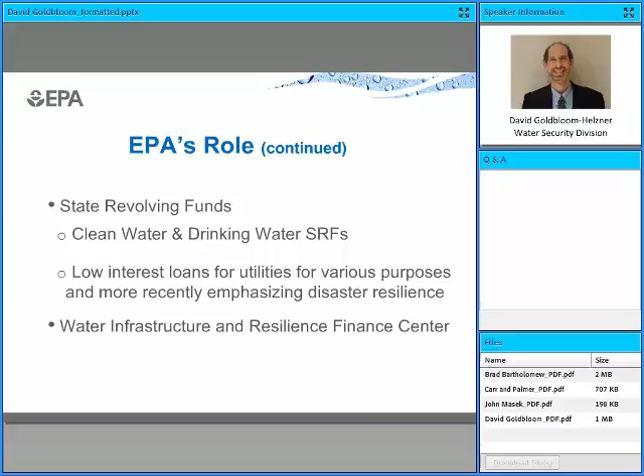I'm pleased that Jim Gebhardt, Director of the Water Finance Center, is here to give an overview of the center. Jim?

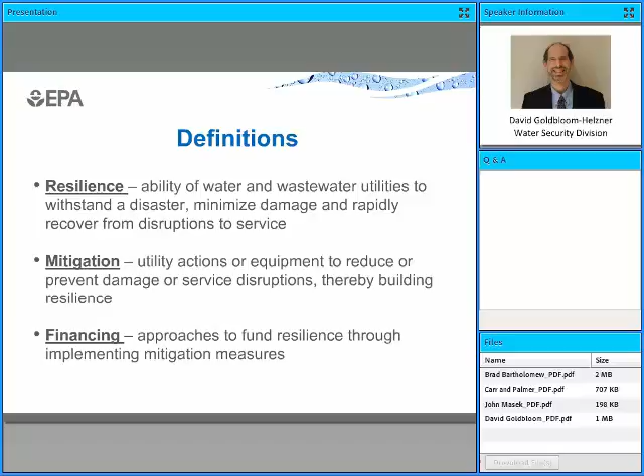I want to define some terms so everyone on this webinar can be on the same page. There are many definitions of resilience. We'll use this one: resilience is the ability of water and wastewater utilities to withstand a disaster, minimize damage, and rapidly recover from disruptions to service. Mitigation are those utility actions or equipment to reduce or prevent damage or service disruptions, thereby building resilience. In the next slide or two, I'll show you examples of mitigation actions or measures. Financing are the approaches to fund resilience through implementing mitigation measures.

Also, with mitigation, you'll be better able to withstand and recover more quickly from a disaster. And finally, with mitigation, you can assure your customers that water and wastewater services are reliable even in a disaster.

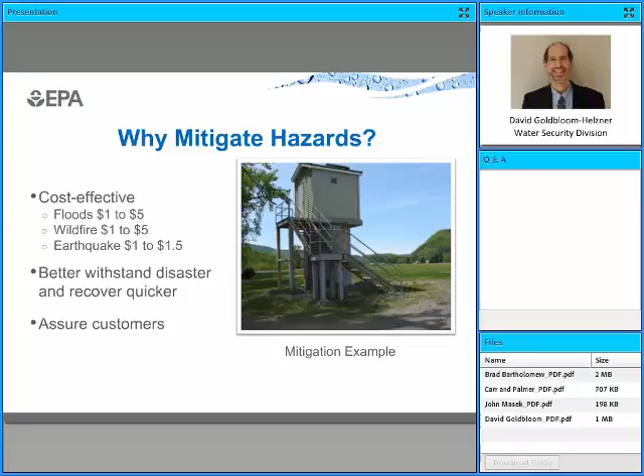For example, in upstate New York, one town decided to mitigate the threat of flooding they had from heavy rains. They invested in elevating their wellhead and their electrical panels, as you can see. During one recent flooding event, they were the only town in the area to continue to operate their drinking water well. This is really a mitigation success story.

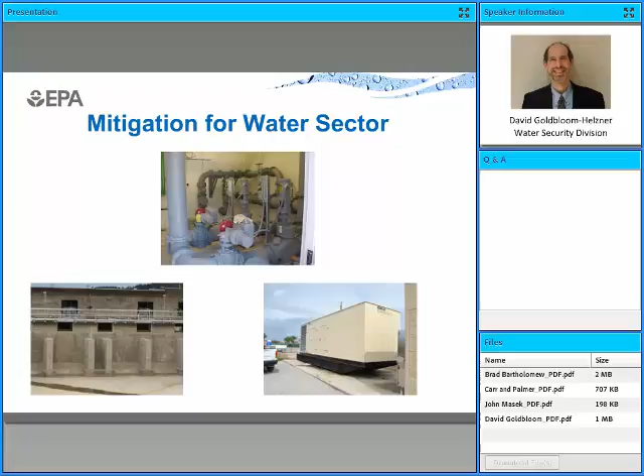Fortunately, water and wastewater utilities can connect into a national program for hazard mitigation and be eligible for federal funding.

So how to connect? To help you get mitigation funding, start by plugging into the existing partnership between the water sector and hazard mitigation agencies. If you are a water or wastewater utility, your counterpart is the hazard mitigation planner.

They are usually located in the local emergency management division or planning agency. Your local mitigation planner looks at all the natural disasters in your county or parish and writes a plan to mitigate the impacts. If you have an idea for a mitigation project at your utility, get it listed in the local mitigation plan so that it's eligible for getting FEMA or state funding. So it's a good idea to reach out to your local mitigation planner.

On the state side, oversight of your utility is at the State Primacy Agency or the State Environmental Agency. Their counterparts are the State Hazard Mitigation Officers, or SHMOs. Yes, they actually wear the title of SHMOs proudly. The SHMOs assist locals to identify cost-effective options and then rank the projects for funding. You'll want your project to be close to the top. Some of the mitigation projects you saw in my earlier photos were funded by FEMA mitigation funds.

And briefly, at the federal level, we at EPA coordinate with FEMA to encourage mitigation policies and funding that benefit the water sector. So let's look at how EPA's new tool, the Hazard Mitigation Guide, can help you reduce the impacts from natural disasters.

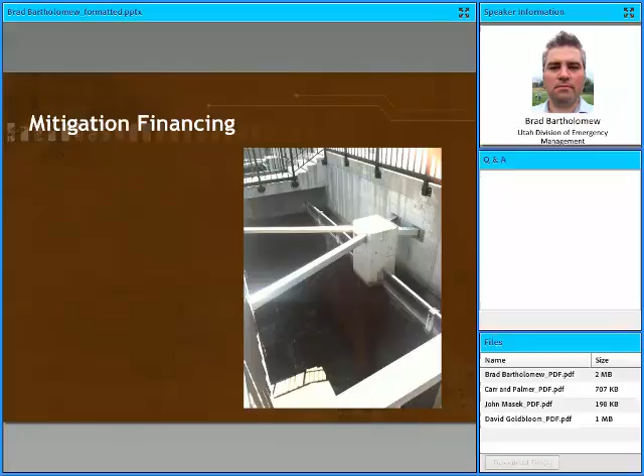And yes, we proudly wear the SHMO hat. There's a SHMO in every state. So again, my name is Brad Bartholomew. I'm the Mitigation Recovery Manager for the State of Utah Division of Emergency Management. And I'll be talking today about mitigation financing and how hopefully you can identify your projects and identify funding to complete those projects. So as I said, every state has a state hazard mitigation officer, and what we do is we assess hazards and identify mitigation measures to reduce risks.

We do that through developing hazard mitigation plans. Each state has a state hazard mitigation plan. The states are required by FEMA to receive not only mitigation funding but also recovery funding to have a mitigation plan. Those plans are updated every 5 years. Utah is currently, we just received funding from FEMA to start our 2019 update.

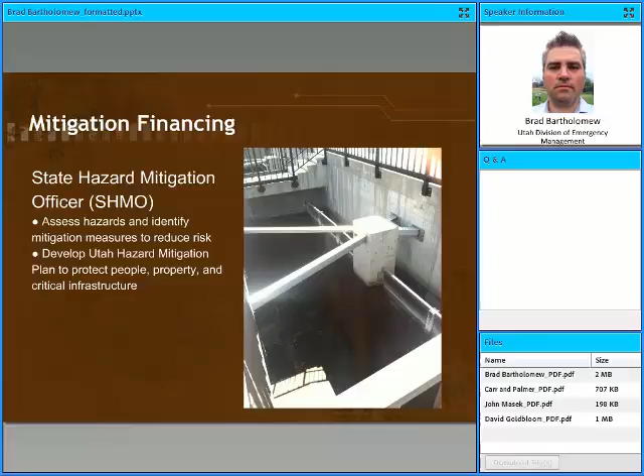Along with the state hazard mitigation plans, every local jurisdiction is required to have a mitigation plan as well if they want to receive any FEMA mitigation funding. The SHMOs assist all the locals, whether it be by city, county, or special districts. We have a variety of all those in Utah. We have several just county plans. Mostly we have what we call Association of Government plans, which is multiple counties get together since most of our state is rather rural. It's easier that way for them. And we also have a number of special district mitigation plans, and I'll talk a little bit more on why we've looked into and gotten into that.

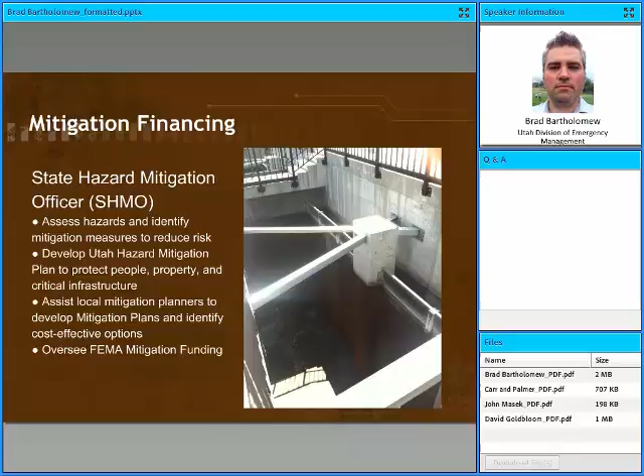And our main job, as well as mitigation planning, is overseeing the FEMA mitigation funding and then working with locals and people such as all of you on the line on receiving that funding, helping you identify projects, and walking you through the process of applying for and hopefully receiving the funding and then the management of the grants.

So David went over these grants. I'm going to talk a little bit more about them. So they're the Hazard Mitigation Assistance Program. And of course, working for the federal government, you have to have an acronym for everything. So we call this the HMA grant program. And under there, we have the Pre-Disaster Mitigation Competitive Grant, the Hazard Mitigation Grant Program, and the Flood Mitigation Assistance Grant.

So the PDM grant is the one we're going to be talking about mostly. Even though the PDM and HMGP are a lot alike, there are several differences. The most is HMGP is only available after you've received a federally declared disaster, and the amount of the funding that is given to the state is based on the total cost of the disaster that FEMA comes in and helps with.

And each state is allowed to decide on how they run that program and how they prioritize funding. I know some states, they use the HMGP funding for only those counties that were impacted by the hazard that was declared, disaster that was declared. Other states, such as Utah, we open that up to the whole state, so anybody in the state can apply for HMGP grants. And then we have FMA grants, the Flood Mitigation Assistance, and those are very flood specific.

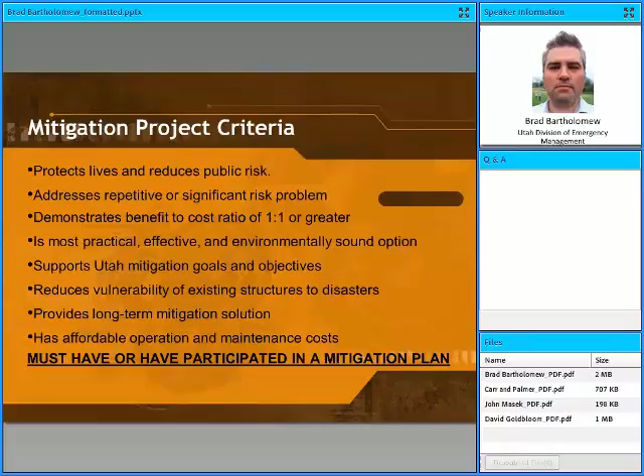So mitigation plans are where you identify your hazards, your risks and your vulnerabilities, and then you lay out how you're going to mitigate those. And during that process is when you prioritize your projects.

For example, Jordan Valley Water Conservancy District was the first special district in Utah to create their own plan. They created it with their own funding - I'm not sure how much they paid for it, maybe John after me can talk about that. We just annexed it to the state mitigation plan.

They participated within our state plan, and they were able to take that funding, or take their mitigation plan, and just start funding the projects they prioritized and found in their mitigation plan to be where they would save the most after an event.

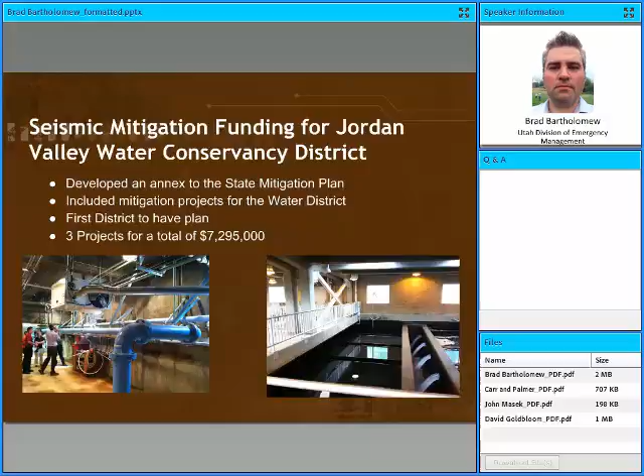Since Jordan Valley Water Conservancy District developed the plan, we've had several other special districts develop plans as well, and they've been very successful at developing their own plans and using that to obtain mitigation funding. The dollar figures you see are the federal funding - not the funding the special districts put in themselves, but just the federal funding they received because they developed their own mitigation planning efforts.

We've seen a large success in special districts developing their own mitigation plan and receiving funding.

Here are some examples - the Jordan Valley Water Conservancy District, as well as the Weber Basin Water Conservancy District. All of their local share, they came up with that themselves, just in-house funding. Once they developed the mitigation plan and had their priorities listed for their projects, they were just able to put that into their capital funds improvement plan, and so they funded for that.

They knew that these are the buildings that we're going to have to retrofit. Let's just start putting funding aside for those - and then they were able to use that funding to get federal funding and help offset the costs.

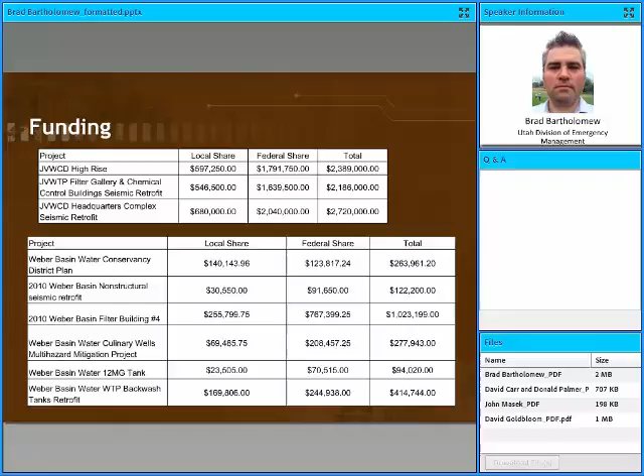And just to close up here, some tips for financing resilience mitigation. The number one tip is to write your own mitigation plan. You might receive some pushback from your SHMOs, and you also might receive some pushback from FEMA. We had to talk FEMA into allowing us to write these local district plans, but the success we're seeing shows that these smaller localized plans really get special districts in focus on what they need to do, and they're able to apply for solid grants. During the planning process and identifying projects, you do a lot of work identifying the projects that need to be done and how you need to do them. And so when you write the mitigation grant itself, you have solid grants that move forward and get funded.

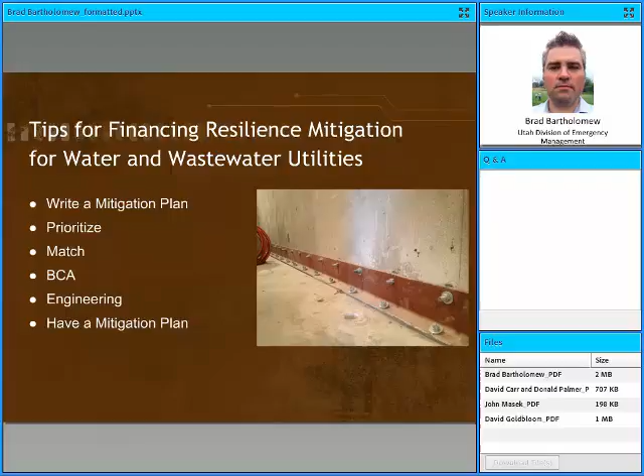Okay, thanks Brad. And just to add to that, I'm actually working with a community in Iowa now that deals with flooding, and the State Hazard Mitigation Officer staff is helping to collect the data and will assist the utilities to do the cost-benefit analysis. So in some cases, they may not really need a consultant to help with that.

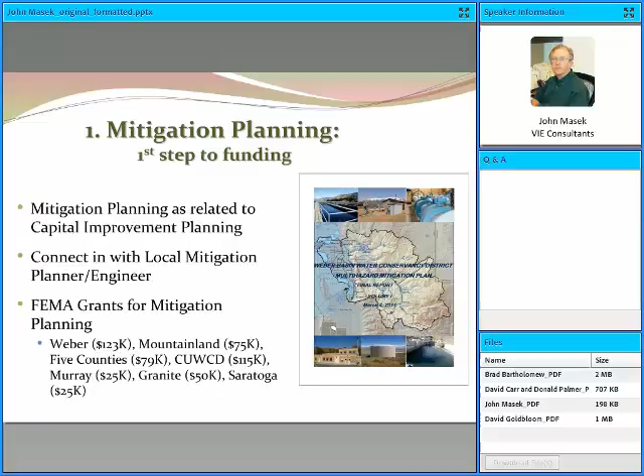The list here shows other hazard mitigation plans that have been approved by FEMA and funded in part by FEMA. So you see, you don't really have to just fund the plans yourself. You can develop a grant to ask that the funds be partially paid for.

This particular project was funded by more than one federal agency. FEMA, through the state, funded the hazard mitigation plan to identify the project in the first place. FEMA funded a portion of the project related to retrofitting critical equipment at the pump station to make sure it was properly anchored, that the pump station itself was sound.

A separate grant was submitted to the Bureau of Reclamation. A grant period is open right now called the WaterSMART program through Reclamation, and Reclamation actually funded the expensive part of the grant to line the canal.

I say that because a lot of the participants in this call were interested in flood and hazard mitigation. The lining of the canal mitigated both flooding so that the canal wouldn't fail, and secondly, was very effective in mitigating a drought. Precious resources from water, instead of just flowing into the ground, were saved there and continued on to be useful. So that was an example of coordinating with more than one federal agency to fund one project.

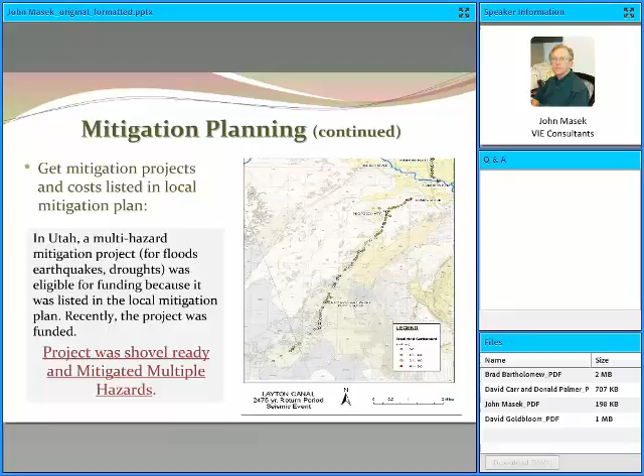So the BCA analysis is a mathematical analysis. It looks at the cost of a project, which needs to be well documented. What FEMA likes to see on their BCA analyses, and for that matter Reclamation and others as well, is sufficient backup to show that the costs really are what you say they are.

There needs to be some level of preliminary engineering and analysis to determine what the cost would be, what the maintenance cost would be. It's not something you can just say that we think this is what the cost is. You have to be able to document it thoroughly.

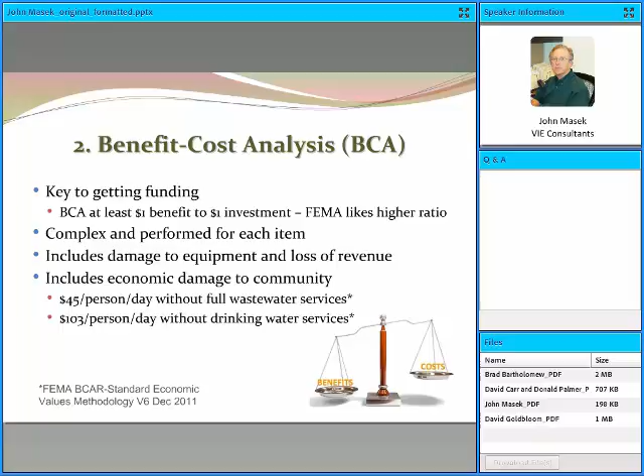One thing about water and wastewater districts is usually they can have a rather high BCA compared to some of the numbers you saw there for earthquake. In the case of earthquake or flood or drought or any of those things we were just talking about, the benefit can be quite high because many people are affected by one mitigation project.

This is an example here. As I mentioned, Weber Basin Water looked at all its facilities, 4 water treatment plants, dozens of wells, hundreds of miles of pipelines, and so on, and identified 17 projects out of all of that that really would have the best effect on mitigating hazards for them.

This is a backwash tank. Those of you in the water, wastewater industry will know what that is. It has to function, otherwise the water treatment plant itself goes down. So in this particular case, if the backwash tank were retrofitted, its reliability following an earthquake was greatly increased. There are a large number of customers affected by this.

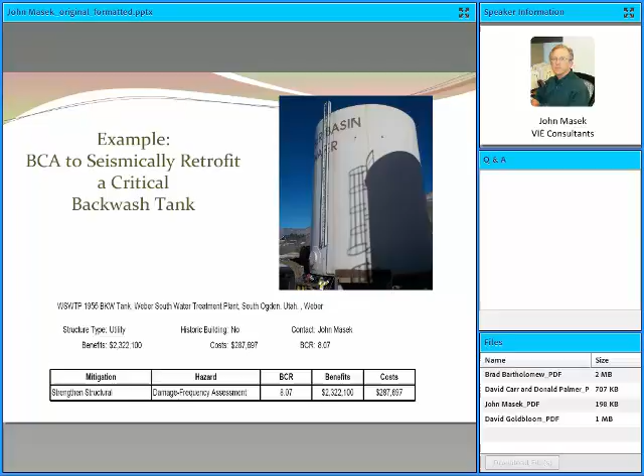Using FEMA, there are different modules that FEMA has in their hazard mitigation software. One of them is called a damage frequency assessment module, and you can see the benefit cost there, BCR is 8. That's a very high benefit for the cost. You can find it by carefully selecting the components, your facilities that are the highest risk and that have the highest benefit, your chance of getting funding is drastically improved.

So with regard to prioritizing the projects, sometimes you'll find projects like I just showed you that have a relatively modest cost and have an enormous impact on your facility. Sometimes the cost can be higher. We looked at some of those larger projects that were funded, but the BCR can still be very high and useful in terms of mitigating the overall system risk.

In the case of water and wastewater utilities, there's an urgency in recovery, and therefore mitigation before a disaster is really something that should be strived for because, for example, in the canal I showed, having that canal fail or the pump station fail and then trying to recover from 3 hazards, drought, earthquake, and flood, would not be a good approach. So pre-disaster mitigation was the program that was used there, partly by FEMA and partly by Reclamation.

Another type of project I want to show correlates back to the hazard mitigation plan. This is again Weber Basin Water, one of their water treatment plants. Usually on water treatment plants, building an entirely new plant isn't what happens. More often, existing water treatment plants are modernized. The left half of that slide is all new filtration buildings and chemical process buildings, and the right hand is mostly existing basins that were retrofitted with some new basins.

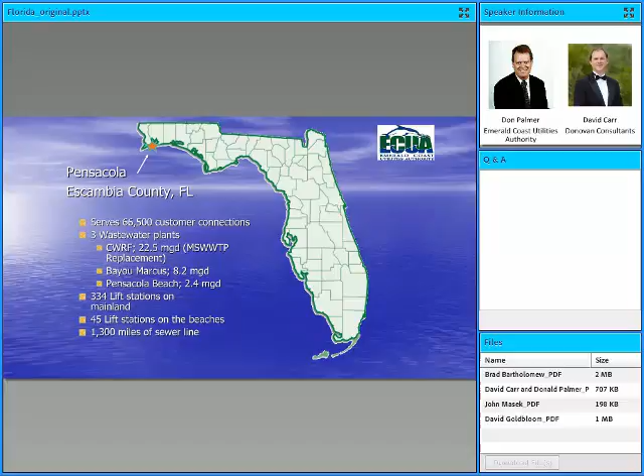Back in early 2000, ECUA formed a committee due to public input to study whether to upgrade in place or replace the Main Street wastewater treatment plant with a new facility. It was the Strategic Main Street Replacement Team. They called themselves the SMART Committee, and they funded a study.

The county got involved. We are a special authority, set up by the state legislature. We took over the infrastructure of the city and the county. The idea was to implement cost savings due to one entity operating them both, and to close down a bunch of facilities, and we did that. But we are a separate authority, though the county was involved, with joint kind of support from the county.

There were a lot of people wanting to move the plant, and the study came forward and said we really want to move the plant, not upgrade it where it was. There are some reasons for that, but out of the study, the problem was, like most governmental studies, we didn't have any funding. The board was not willing to increase rates enough to move a wastewater treatment plant. So they set forth a funding plan: we're going to come up with three sources of funding, trying to get a third of it federal, a third state, and a third local. That's kind of where we started off on this project.

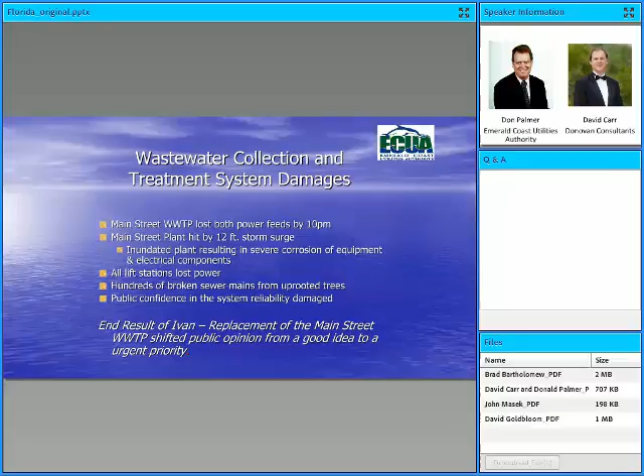And that helped us work with our SHMO. Miles Anderson was instrumental in making this happen. And so that was the main thing that happened with Hurricane Ivan. So with that, I'm going to turn it over to David Carr.

Good afternoon. As Don mentioned, prior to Hurricane Ivan, we had a feasibility study that basically indicated we need to get the plant out of downtown Pensacola and away from the danger of the hurricane surges and high winds. This is the plan that resulted from that feasibility study, and like Don said, it was completed in about late 2002.

From 2002 through Hurricane Ivan, we were pursuing funding. With Hurricane Ivan, that funding became much more possible. So through the feasibility study, we developed this rough plan. While we were pursuing funding, we also started on a facilities plan, and that facilities plan resulted in the details of this.

In the lower corner of the map, you can see where the existing treatment plant is. At the very top end of the map, you can see where our new wastewater treatment plant is, the Central Water Reclamation Facility, approximately 18 miles inland. Some major features of this system include 3 regional pumping stations and force mains ranging from 18-inch up to 54-inch.

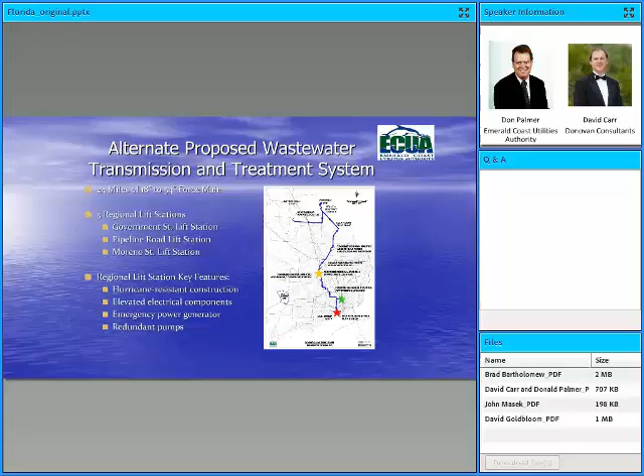Basically, a Cat 1 storm would start flooding problems at the Main Street plant. We experienced a Cat 3 on September 16 of 2004, which put the plant out of commission for several days, as Don mentioned. The main feature of this replacement plan is the new treatment plant.

As I mentioned, it's about 18 miles inland. It's designed as a 22.5 MGD AWT plant, 5/5/3/1, also capable of drying 20 tons per day.

We achieved 100% reuse of effluent through co-locating this plant in the midst of several industries, including Gulf Power and International Paper. Gulf Power being a power plant, it uses a lot of water for cooling, and the paper plant uses a lot of water for its cooling and process purposes. So we're able to get the benefit of 100% reuse there.

Some other features of the plant include reject storage capability that we did not have in our downtown location, and a 60 million gallon wet weather storage capacity that we also did not have downtown. So through locating this facility off-site, we're able to significantly improve the treatment capacity, capabilities, and resiliency of the facility.

This being a webinar on resiliency, I'll point out that this didn't really start out as a resiliency project or a mitigation project. It started out as a repair project. But the ultimate result is to be a mitigation project, in that we were originally intending to repair just what we had downtown, even though we'd like to move it, but we couldn't find the money through our efforts up to 2004. When Hurricane Ivan hit, it sort of changed the picture, as Don mentioned.

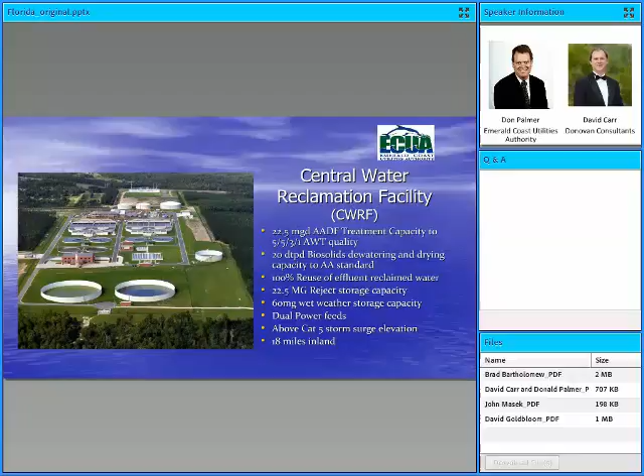Got to get this done. So we started getting a lot more open doors for us. Miles Anderson came in and was able to guide us through much of the FEMA process.

Basically, we started out looking at just the repair aspect, to say how can FEMA help us get this thing back up and running, and what can we do from there to keep it from happening again. We went from the repair of the direct facility to looking at an improved project.

Which would include some unfunded mitigation efforts. We were looking through the public assistance program, the 406 public assistance program, which is primarily focused on repairing the damage. So at this point, we were not also looking at the 404 mitigation program, but just looking at the 406.